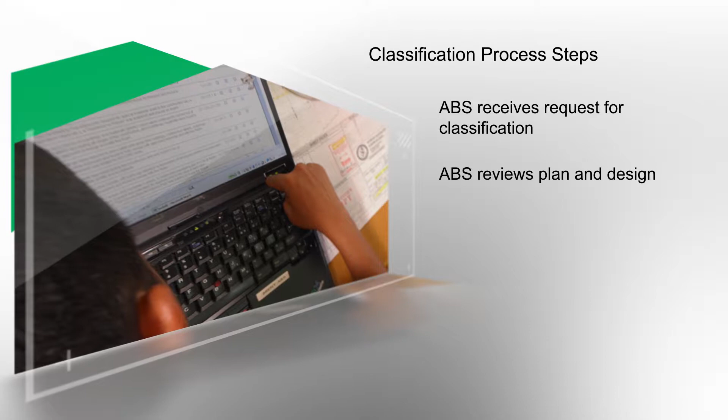Engineers and surveyors use the ABS rules and guides during the classification process to verify compliance of the vessels and marine structures. Typically, ABS receives a request for classification from a shipyard or an owner. ABS engineers conduct a plan review of the design. ABS surveyors verify compliance at a shipyard, construction facility, or manufacturer workshop.

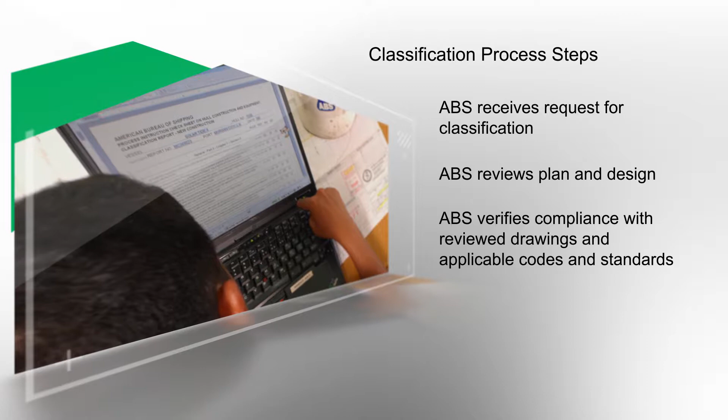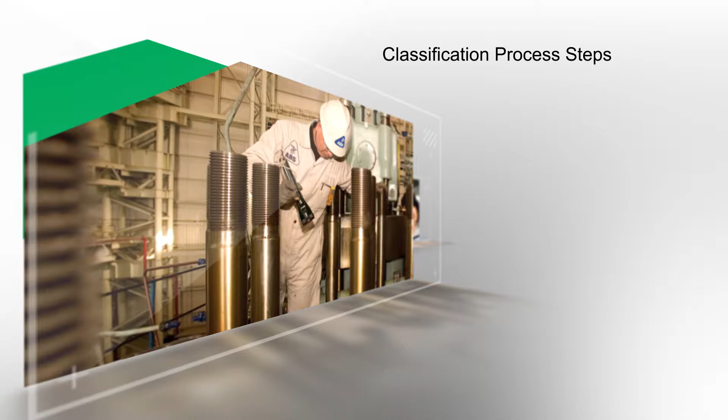Once the vessel construction is completed, sea trials are conducted for testing and final commissioning under the attendance of ABS surveyors. When the sea trials have been performed satisfactorily and all the ABS outstanding items have been resolved, the vessel will get an interim class certificate, which is normally a 5-month certificate that allows time for the classification committee to review the reports. The ABS classification committee will verify that the vessel is in full compliance with the rules based on the documentation issued by engineers and surveyors, and if determined correct, it will grant classification to the vessel.

From that moment, the vessel will be subject to periodic surveys carried out by ABS surveyors to verify that it is maintained in compliance with the rules.

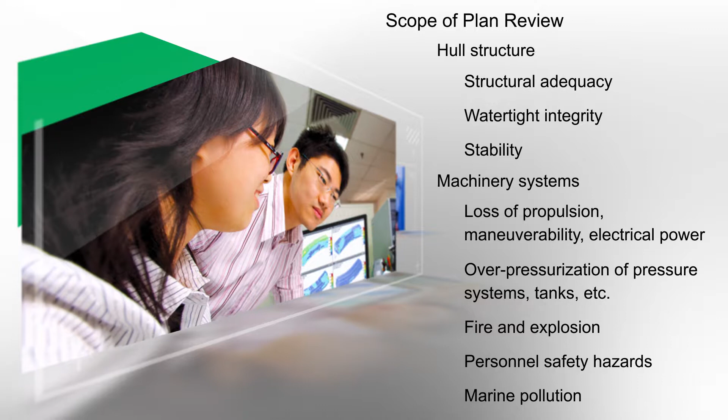ABS engineers perform the plan review based on the design requirements of the rules and guides. The design rule requirements cover hull structure, machinery systems, and equipment. The goals of the hull structure requirements are to maintain structural adequacy, watertight integrity, and proper stability of the vessel, while machinery requirements are focused on propulsion and maneuvering capability, machinery, and cargo hazards.

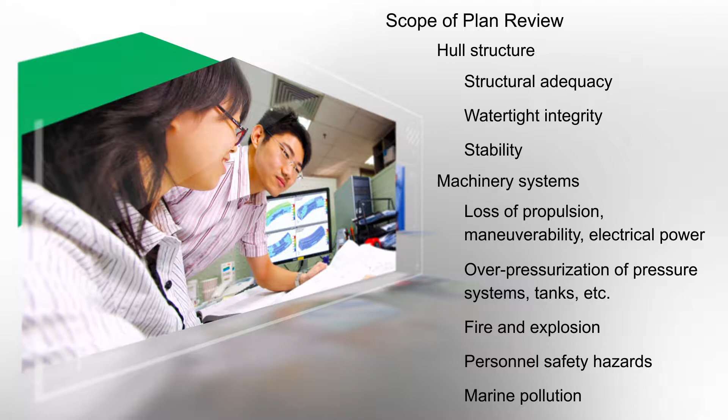ABS engineers also review plans against statutory regulations when ABS is authorized by the Flag Administration to issue these statutory certificates.

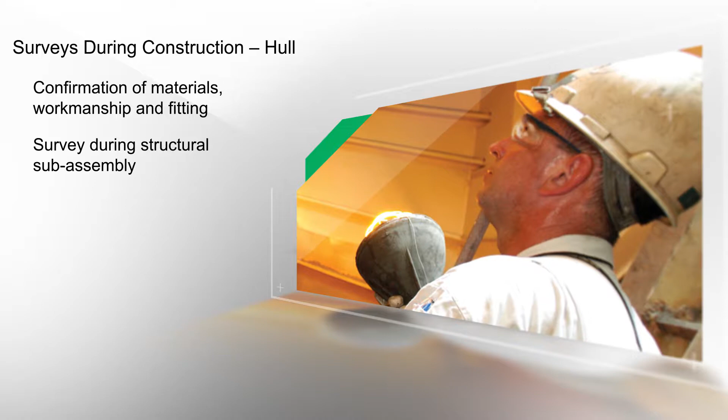The hull construction survey begins with the verification of steel plates against the approved drawing. There, the scantling and grade are verified, as well as certification of plates. Once the subassemblies are joined, it becomes a bigger structure called a block. This is inspected to verify welding joints and alignment.

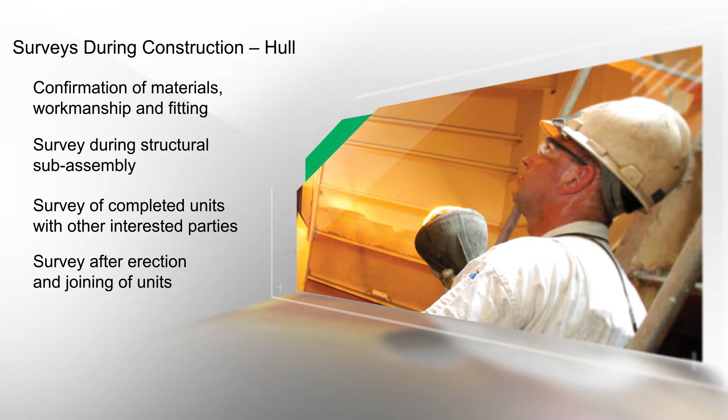Weld joint inspection is carried out by non-destructive methods. The extent and method are agreed by surveyor and shipyard, taking into consideration the requirement of the rules or guide. Blocks are joined to form a tight space, such as cargo, ballast, and tank, and inspected for structural integrity and tightness. An ABS guide for hull survey for new construction is available for more detail.

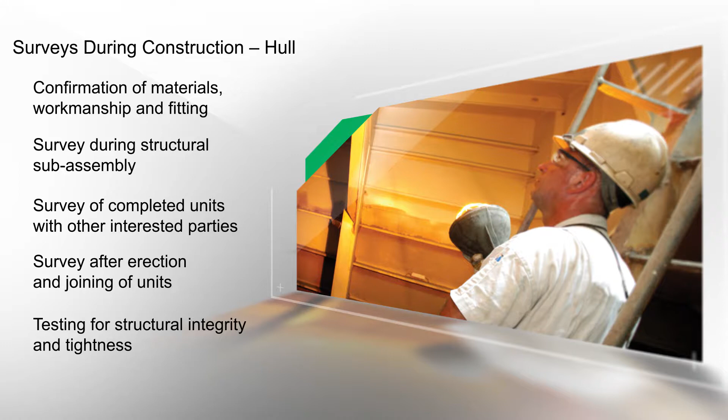Surveys of machinery installations, all associated piping systems, and electrical systems are carried out by visual examination, operational test of equipment and machineries, and by hydrostatic testing to confirm compliance with reviewed design drawings and applicable rules, codes, and standards. The independent tank in the engine room is tested visually and for tightness.

Main propulsion equipment is verified in accordance with the alignment specification. Resin chocking is verified in accordance with the manufacturer's guidance.

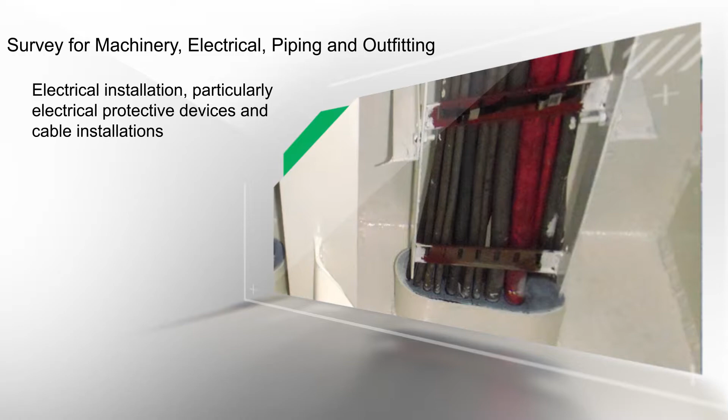Penetrations for electrical cables and pipes are verified for tightness and fire integrity of the affected space. Cable penetration is run through an approved cable penetration or transit device to maintain watertight, gas-tight, fire-rated integrity of the bulkhead.

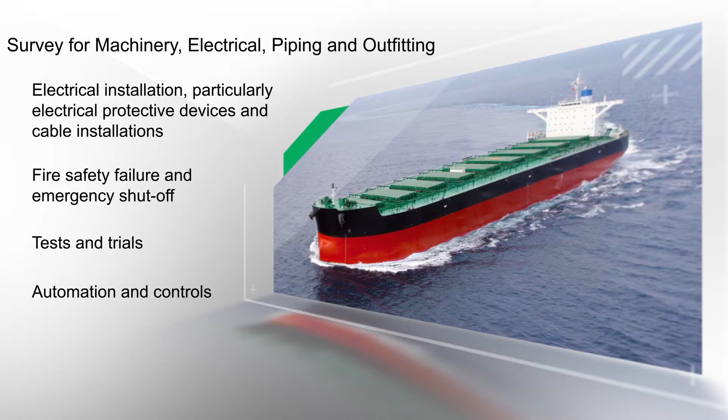Operational test and sea trials are carried out upon completion of hull fabrication, outfitting and machinery installation, and automation and controls as applicable. Hull and onboard machinery testing would normally be considered complete upon completion of the sea trials and remedial action for any unsatisfactory condition found.

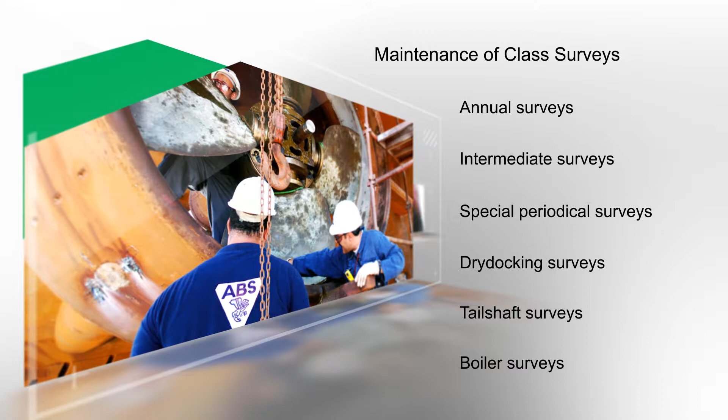Once the vessel or marine structure is accepted and classed, it is subject to surveys for maintenance of class. The surveys are carried out in accordance with the relevant requirements to confirm that the condition of the hull, machinery, equipment, and appliances comply with the applicable rules. The owner verifies that the ship's maintenance is kept at a satisfactory level to maintain the condition between surveys.

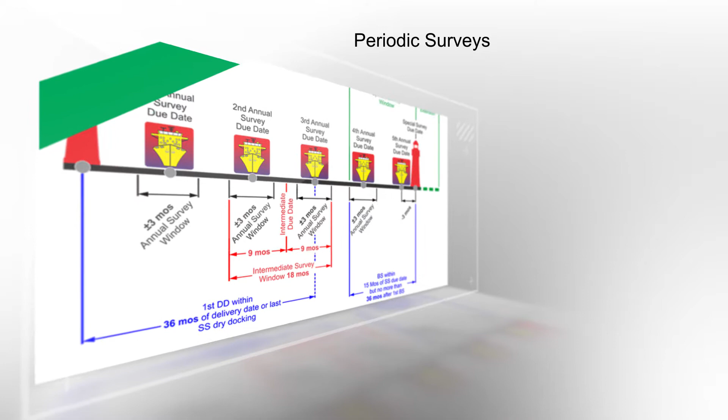Underwater surveys may be conducted with approval from the Assistant Chief Surveyor. A diver shows the vessel to the surveyor through a camera connection. Special surveys require dry docking.

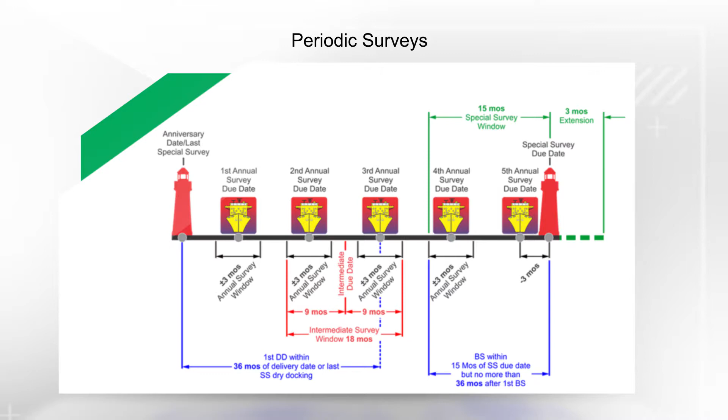The continuance of the classification of the vessel is conditional upon the rule or guide requirements for periodical, damage, and other surveys being duly carried out. Failure to submit from the owner any damage for examination upon first opportunity may be ground for class suspension.

Equipment and machinery considered essential for class are certified individually. That means that for each piece of equipment or machinery, the surveyor has to carry out the inspections and witness the tests as required by the applicable rules. Drawing approval by an ABS technical office and witnessing material testing may also be required.

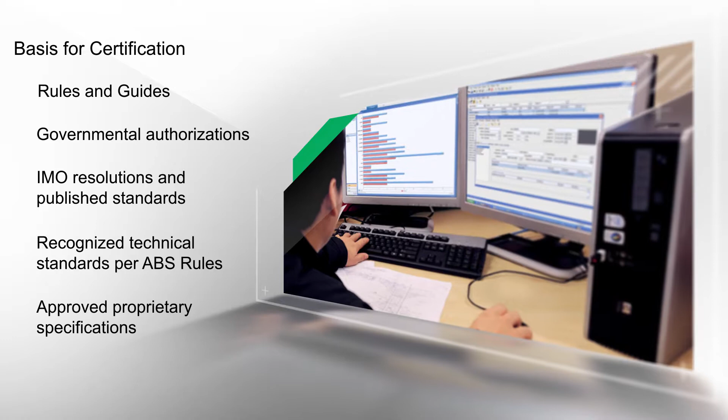The basis for certification may be government authorization, IMO resolutions and published standards, recognized technical standards per ABS rules, or approved proprietary specifications. Only classification societies are able to class ships and other marine structures, while machinery and equipment certificates may be issued by a class or other organization or by the manufacturer of the certified product.

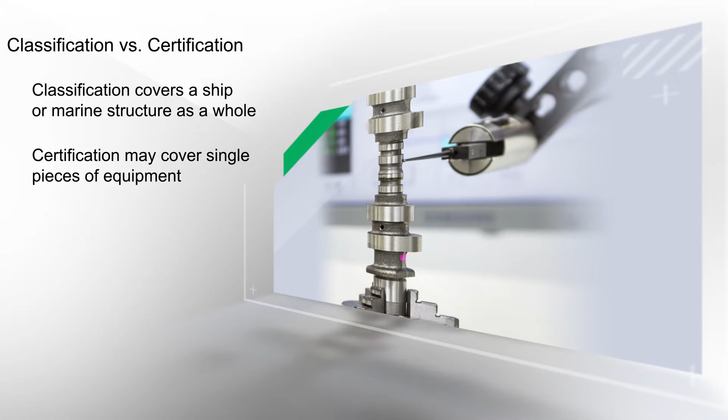Classification covers a ship or marine structure as a whole. Certification may cover a single piece of equipment. Next, the transfer of class is presented.

An owner may decide to change class societies for various reasons. An owner may purchase a ship previously approved by another class society and change to a preferred class society. Change of flag and trading pattern is another reason. Other reasons are change due to poor service delivery, consolidation of fleet under single class for a favorable service agreement fee, and competitive advantage.

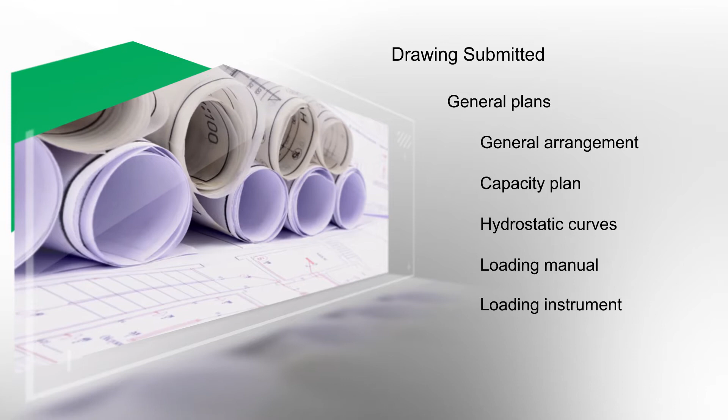If ABS is the requested classification society, we may survey the vessel to determine its condition before accepting it. The transfer of class process requires criteria to be considered by the Assistant Chief Surveyor or Chief Surveyor regarding the vessel's eligibility. The responsible Assistant Chief Surveyor gives survey instruction.

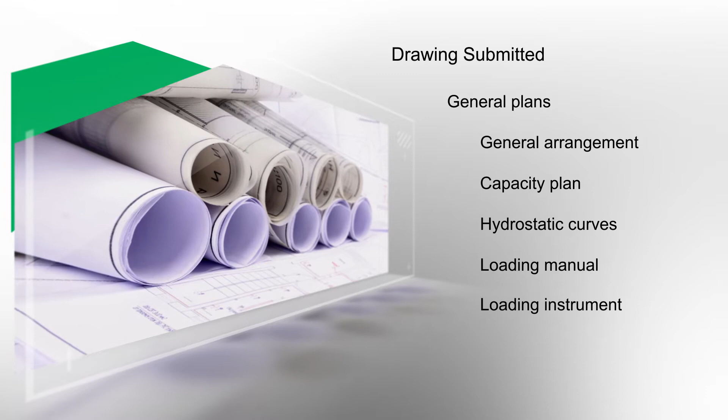Once the vessel is eligible for transfer of class, key vessel drawings for hull, machinery, and electrical need to be submitted. Drawings have to be submitted to the ABS Technical Office. Machinery drawings are submitted to the ABS Technical Office.

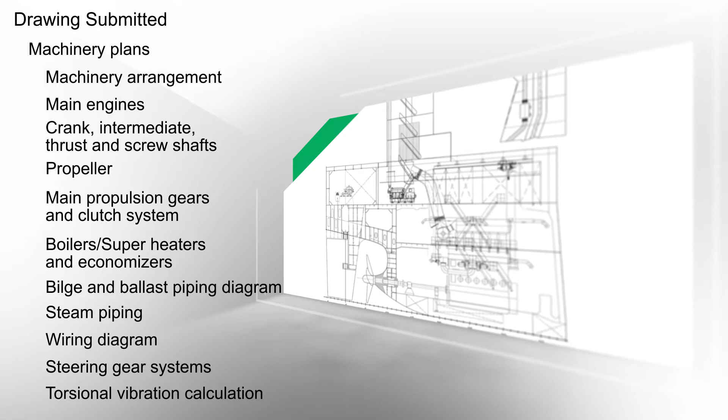In addition to the submitted drawings, an applicable survey is required in accordance with the process instruction and as required by the Divisional Assistant Chief Surveyor. Any recorded outstanding items and deficiencies from the previous class society require complete rectification for the gaining society.

Suspension of classification is a withdrawal of all representation by ABS to the vessel. Class can be reinstated upon satisfactory completion of overdue survey or recommendations, whereas cancellation of class requires starting over by submitting a request for class.

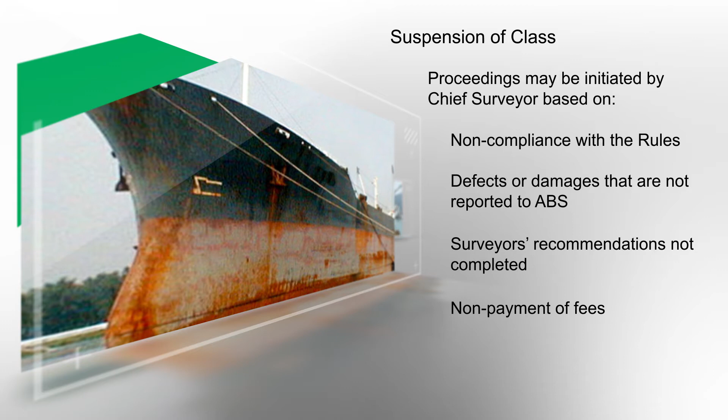Suspension of class may be initiated under delegation by the Chief Surveyor based on non-compliance with rules, defects or damages that are not reported to ABS, surveyor's recommendations that are not completed, non-payment of fees, or failure to permit unscheduled surveys. Suspension is done manually through the survey notification system.

ABS provides reminders through email notifications. Suspension and cancellation letters are always sent by hard copy via courier to the owner, with email copies to the Flag Administration through the ABS Classification and Documentation Center, or CDC.

When a vessel is considered a total constructive loss, or TCL, or when the owner is no longer in control of the vessel, the Chief Surveyor may advise the CDC to suspend class, awaiting disposition of the casualty, and to notify the owner. The Flag Administration is also advised that due to class suspension, ABS no longer supports the ABS statutory certificates issued to the vessel.

When a vessel's class has been suspended because of overdue surveys or outstanding recommendations, class is reinstated upon verification of satisfactory completion of the overdue surveys or outstanding recommendations.

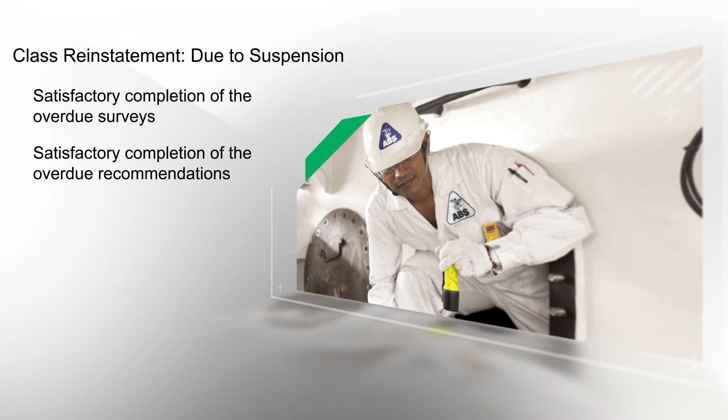When a vessel's class has been suspended because of non-payment of fees owed for classification and other surveys, class is reinstated upon payment of fees. The owner and Flag Administration will be notified by letter.

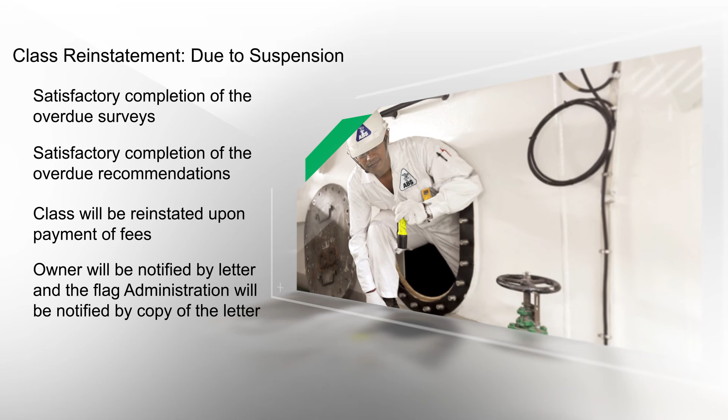Cancellation of class may be initiated by the Chief Surveyor or his designee when an owner is operating a vessel contrary to our surveyor's recommendations or is in violation of trade sanctions. Class is also canceled upon verification from the owner that a vessel involved in a casualty is considered a TCL.

The Class Committee can invoke formal cancellation. If considered necessary by the Chief Surveyor or his designee, class can be canceled at any time, provided 2 ABS officers agree. This procedure does not require prior action by the Class Committee, but will be processed through the committee at their next meeting.

ABS is committed to promoting the security of life and property and preserving the natural environment.